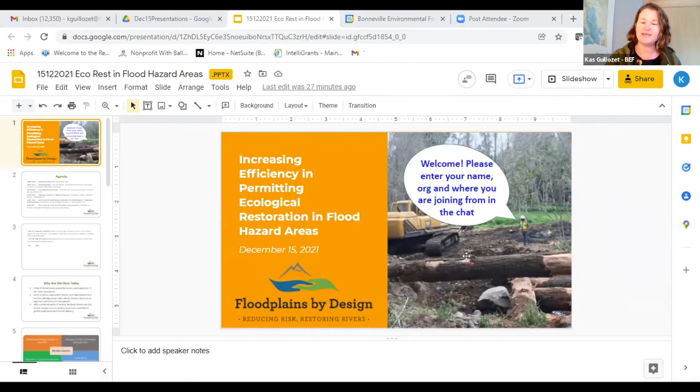I'm not going to completely repeat my spiel from last time, but I am going to orient you to the slides, give you a welcome, and make a couple highlights. My name is Kas Guillozet, I'm with Bonneville Environmental Foundation, and I have the honor of supporting the Floodplains by Design program. This is brought to you by Floodplains by Design in conjunction with many other partners. I want to give a shout out to my colleague Hannah, as well as Brandon Parsons, core members of our team, and Carol McElroy, a consultant who has been invaluable.

These slides are the same as last time, so if you were with us during webinar 1, the messaging remains the same. I did want to make a couple key highlights for you, however. First, the first webinar provided some perspectives from the field - why are we even gathering to talk about permitting, and what efficiencies might be possible in the realm of feasibility within legal requirements, balancing needs and interests.

The rescindment came up a few times and was explained a bit by different speakers, but there was one key piece informing a lot of what we're hoping to touch on today, and that relates to no rise requirements. Others might emphasize this as well.

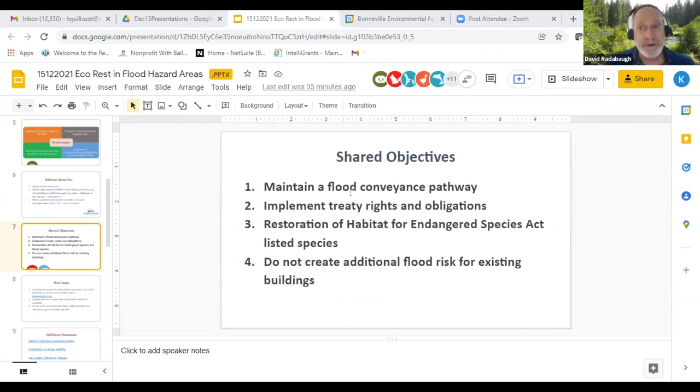In a sense, these webinars are an effort to have a discussion about how to bring these goals and objectives into alignment with each other and move forward simultaneously with them.

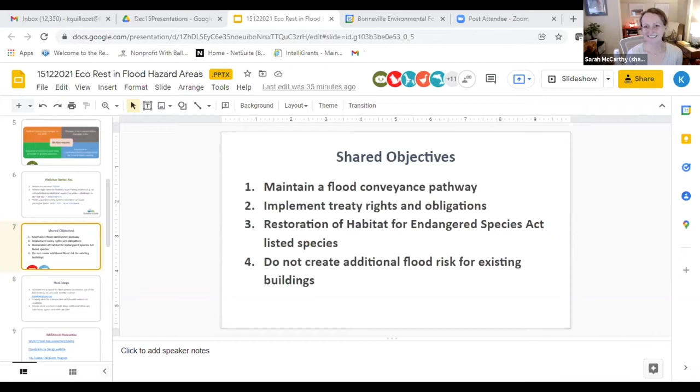Thank you. You said you have my slides up. I think I'm sharing my screen, right? Yes, can you see okay? Can folks see my slides? I'm seeing the shared objectives one, wrong one, sorry, but I'm happy to share from mine. Okay, if that works, I can bring it up. Apologies. Sorry about that. It's okay.

Okay, so thank you, Kas. My name is Sarah McCarthy. I'm a supervising ecologist and project manager for King County's Water and Land Resources Division, and my work is mostly as a project proponent, primarily in salmon habitat restoration projects. Next slide, please.

Like Kas said, I'm going to talk about conceptual project timelines and permitting considerations. As any project practitioner here knows, our projects can vary in complexity, from a small scale project working primarily outside the channel, maybe in a smaller stream without a federal nexus, to larger scale river projects where we're really trying to make big changes and reconnect the floodplain, with more impacts, federal nexus, etc. But no matter the scale or complexity, early assessment of our impacts is essential to effectively scheduling and budgeting our projects.

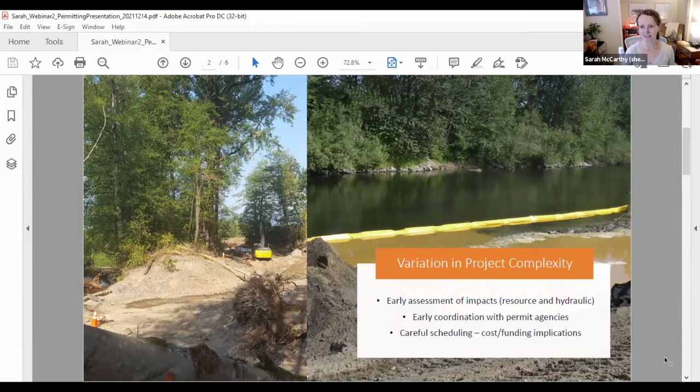With that early assessment of impacts comes a need for really early coordination with the permit agencies, both on the resource side and including the local floodplain administrator to understand what the requirements will be. Again, careful scheduling, understanding the timeline associated with those permits and with any hydraulic modeling needs and design loops, because all of that has cost and funding implications for our projects, which are working with limited funding and a critical timeline for salmon recovery.

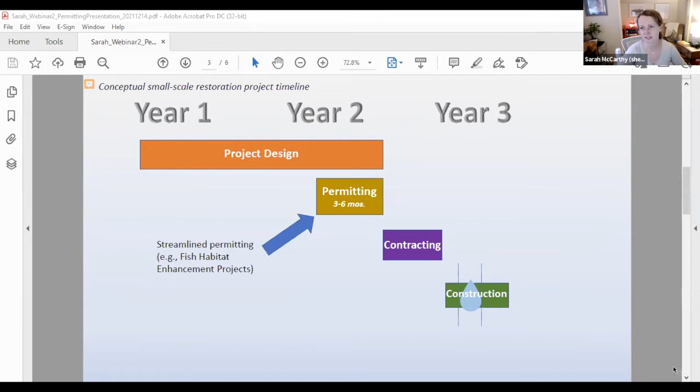So this is a conceptual timeline for a larger scale project. Again, these are largely made up, but in part based on experiences. Maybe this project takes a little longer to design, say 3 years. There's more analyses, more modeling required for the project, and say there's a federal nexus, so federal permits are required for the project.

Again, you're still striving for that in-water work window. You have a schedule that you know of, and you've made commitments to funding agencies. So again here, and this is where I think a lot of our worries and angst are coming from this year through these processes, is what should we be planning for? What does our timeline mean? And for projects that are already underway, what are the impacts going to be to our schedules?

So say with this project, it's going through the federal permitting process and modeling during that time, and determines that a CLOMR is going to be required. As far as our understanding, that starts once Endangered Species Act consultation is completed. If that extends the permitting timeframe, you're looking at risk to not hitting the in-water work window.

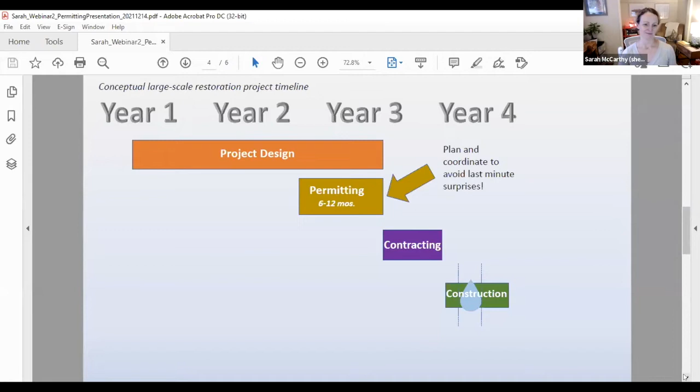So next slide, please. So even a small change in the project timeline can cause a project proponent to miss that in-water work window. Next slide, please.

And so, like I said, even small delays there can lead to bigger delays in construction timing. That has implications for grant funding for our projects. It has implications for cost associated with additional permit requirements that the project proponent maybe wasn't anticipating early on.

And so the bottom line here is that what we're trying to avoid is really putting our critical funding at risk, delaying the benefit for salmon that are depending on us to restore the habitat as quickly as possible.

And so I'm very excited to be part of this process, to look at opportunities to increase efficiencies, looking for flexibility where they might exist. My advice to project proponents is really to plan ahead, ask questions, and work with the permit agencies, including the local floodplain administrator, as partners to find the most expedient path forward.

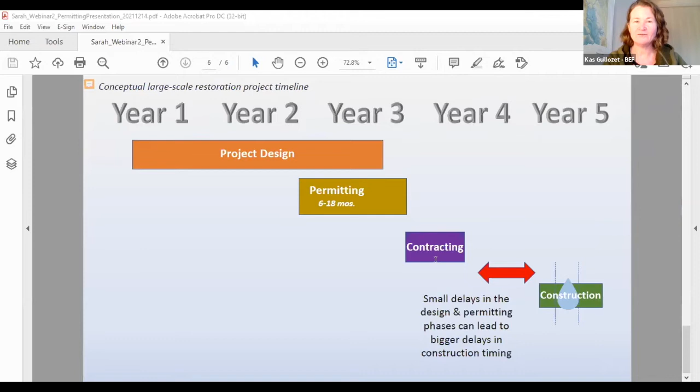Yeah, I'm glad to be here, and I'm hoping that you can hear me and that we can get slides set up. I'm going to try and cheat and have my version of my slides on my side so that I can see my notes. Let's see if I can make that happen. Okay, I think we got it there. So, you're showing the full version, so you're going to give away my poll question. No, I'll put it on present mode so people can't see. Yeah, go ahead and do that. I don't want people to get the... there we go. All right, thanks, folks.

Yeah, my name is Dale. I joined FEMA Region 10 in July as a civil engineer. I previously worked for a local community for the flood control zone district. Prior to that, I was a consulting engineer specializing in flood risk reduction and floodplain restoration projects. Just as a caveat, I'm the new kid on the block at FEMA. I've noticed already that Briar is a ninja in the chat answering questions, and I'm really glad to have a couple other FEMA folks here so that when we get into discussion, we can talk on some of the pieces that I'm less familiar with.

I'm not going to talk about the rescindment at all. What I want to talk about today is the 2D no-rise. So next slide, please.

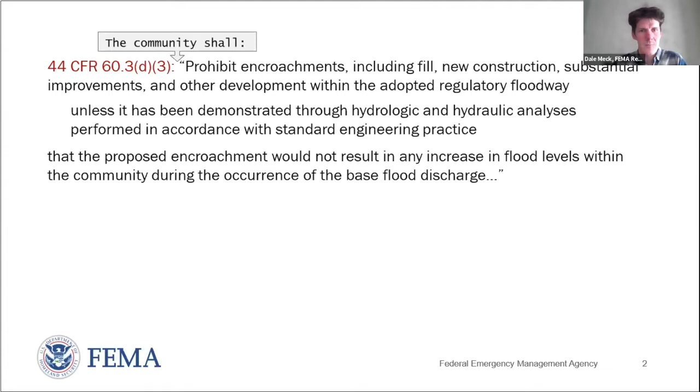Okay, so that regulation was written back when the NFIP was getting started. At that time, standard engineering practice was really limited to one-dimensional modeling. We didn't have many of the tools that we have today. And as a result, the regulations essentially have the simplifying hydraulic assumptions of 1D baked into them.

I won't get into the weeds here on modeling, but essentially for a 1D model, one-dimensional, you have to assume which way the water is going to go across the floodplain, and you have to assume which areas on the floodplain aren't effective—they don't move flow, they're just ponded areas. That all happens from somebody looking at a map and figuring it out, but you have to make that assumption outside of the model. A 1D model isn't aware of lateral variability in the floodplain—it's very straight line, one-dimensional. Those hydraulic assumptions are somewhat baked into the way that the regulations work.

And until recently, that was kind of baked into FEMA's implementation of those regulations—the guidance and the standards that we put out. So today, what I want to talk about is some updates to that guidance and standards as it pertains to the use of 2D models, specifically on the no-rise. The hope is that for some ecological restoration projects, this might be helpful for getting things done more efficiently. We'll talk more about that, but first I want to launch a poll question.

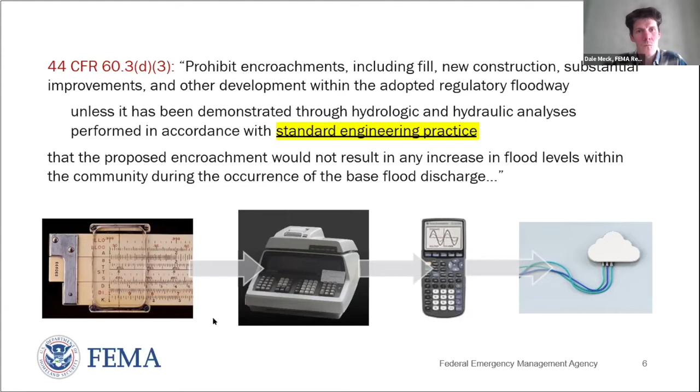guidance and standards documents to support the way that the program is implemented. This is essentially FEMA's interpretation and implementation of the National Flood Insurance Program and all the related CFRs. These policy documents are updated annually to reflect the way that we have new tools and new methods changing, so they've gone through a lot of changes.

GIS was a big one, the ability to do digital products was another one, 2D modeling is another one. The 2021 updates just came out actually. I put the link at the bottom, and I'll drop it into the chat a little later when I have a chance.

This is essentially the way that FEMA administers the National Flood Insurance Program, and it includes all sorts of rules on how to change the maps, what the maps need to have on them, how they need to be produced. But it also has guidance on the no-rise.

I'll note before we go on that this guidance and standards library, if you will, there's over 3,000 pages of document in that collectively. There's a lot of material, it's a complex program. They're all sorted into different categories. One of the things I'm hoping to do at the regional level is work to make certain parts of that more accessible, more available, in bite-sized pieces, and we'll touch on that a little bit more.

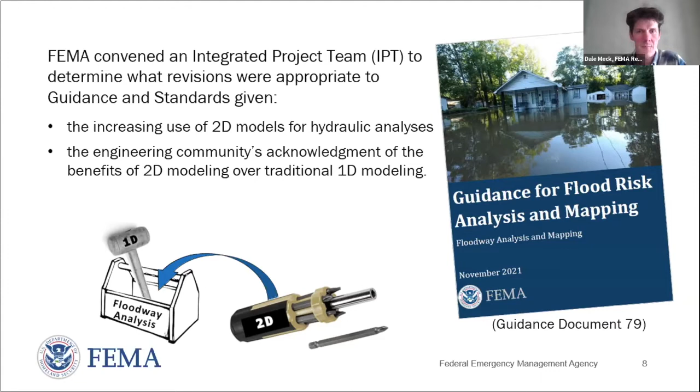What I want to do today is summarize some key points from it, recognizing that a couple of the other talks today are going to hit on field case studies that used a method along this line. There's a lot of text, so next slide.

In chapter 11 of guidance document 79, we lay out how you can do the no-rise analysis. This no-rise guidance is very similar to what you see in the regional document, the 2013 version, but it also has information on what to do for 2D models.

Essentially, the way it works is we let the model decide where the cross sections should be. We dump the water into the model and let it flow. Then instead of using an arbitrarily drawn cross section, we basically use what's called an evaluation line, which you could think of as a hydraulic cross section, to evaluate projects and whether they raise the base flood elevation.

A 1D model kind of averages all the way across the cross section, giving you one value for water surface elevation for the whole cross section. Whereas a 2D model gives you a water surface elevation at every cell across that evaluation line. So in order to do the same level of analysis as a 1D model does, which is what the CFR was built on, guidance document 79 says you can do that same analysis using a 2D model if you average the base flood elevation changes across that cross section.

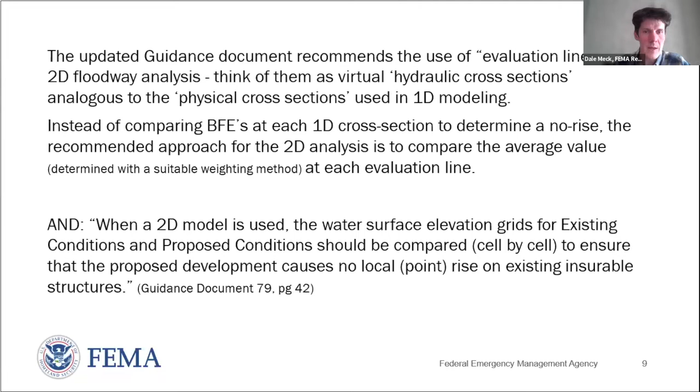If you can't meet that no-rise requirement, next slide, you still have to follow the CFR and the local ordinance. The CLOMR may be your best route. In a lot of situations, we tell people to just plan for it — if you can meet the no-rise, great, you save budget and time, and if not, you're ready to go.

We are working to update our regional no-rise guidance document to boil down chapter 11 of guidance document 79 to make it more accessible, both for project proponents, and we really want to stand by our local floodplain administrators so they know what to expect with a submittal and whether they can approve it or not.

I think that's it. I'll be around afterwards, and I'd love to talk more about this, but I want to respect the time here.

Hi everyone, thanks Kaz, and thanks everyone for putting on this great webinar. It's great to get all this input and continually try to improve the state of practice. This presentation will provide an overview of a case study that utilizes some methods proposed to FEMA for evaluating floodplains and floodways with 2D models a few years ago. This project was actually used to satisfy a no-rise for a project located in Yakima County.

Like Dale was saying, at the time this specific case study was developed, that 2021 FEMA document 79 that Dale mentioned was not yet available for public review, and at that time there really was no guidance for 2D modeling. In the last two years there have been some advances, but there's definitely a need to continue advancing that. Let's go ahead and advance to the next slide.

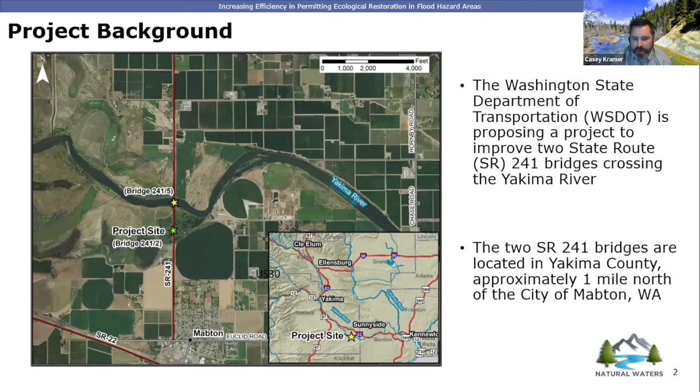This case study focuses on a bridge retrofit and a bridge replacement project on State Route 241. It crosses the Yakima River just north of the city of Mabton in Washington. In this photo, the flow is going from left to right. Go ahead and go to the next slide.

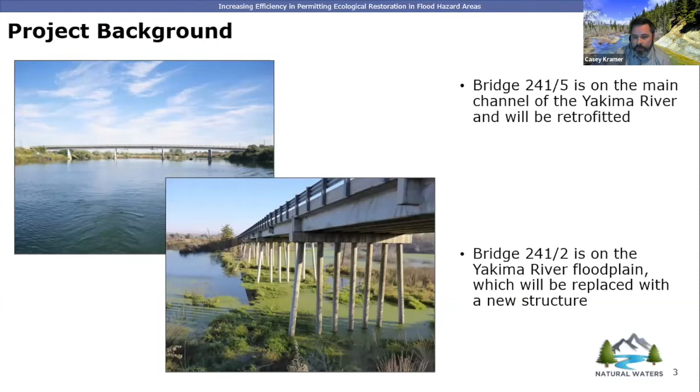There were two bridges. One was 241/5, over the main channel of the Yakima River - this one was only being retrofitted, so there was no in-water work. But the photo on the bottom, bridge 241/2, was located in the Yakima River floodplain. This is the one that was actually going to be replaced, providing an opportunity for more floodplain connectivity in the overall floodplain of the Yakima River. Go ahead and go to the next slide.

One key distinguishing criteria, as with any project, is really to go in and determine where your project resides within a special flood hazard area. This project site specifically was located in a FEMA regulated floodway. This graphic utilizes the FEMA National Flood Hazard Layer Viewer website, which, if it's available and updated for your project, can be a really handy tool for getting special flood hazard area information.

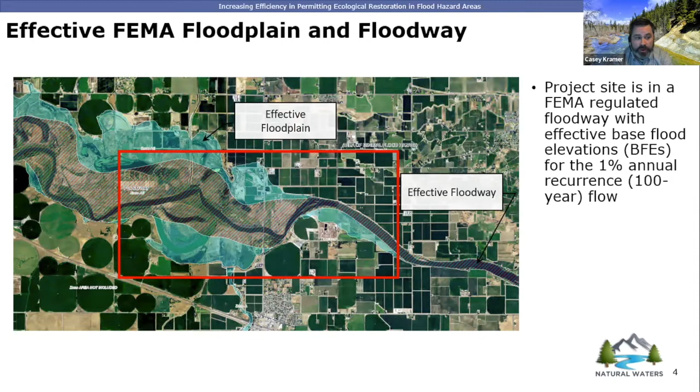For those that haven't looked at these before, the two distinguishing characteristics in this floodplain are the effective floodway, shown with those red hash diagonal marks in the main core of the flow, and the blue shaded area, which is the 1% annual recurrence, or the 100-year flow inundation limits. Let's go to the next slide.

That red box in the previous slide - this slide is a zoomed in version of it, depicting the FEMA base flood elevations, or BFEs, shown as the little wiggly lines with an elevation associated with them. Also shown here are FEMA cross sections, depicted by the black lines with letters next to them, and State Route 241, shown here with the red line. Flow is going from left to right again. As we'll discuss further regarding how a no-rise was completed for this, the base flood elevation on the furthest downstream extent, the far right squiggly line, was utilized as the boundary condition for this no-rise assessment. Let's go to the next slide.

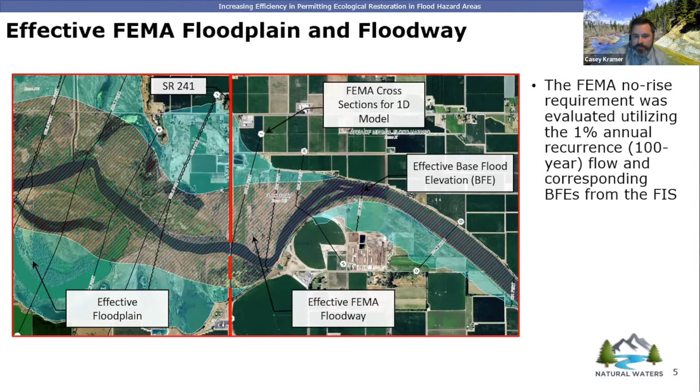For those that joined us for the first webinar, Ted went over a general no-rise process that would be utilized. But for folks that weren't able to attend, or are new to a no-rise, this lays out the general process a licensed engineer would have to go through in completing a no-rise process. We'll be walking through these steps as we go through the presentation, but the first step is obtaining a copy of the effective model used to develop the effective flood insurance study.

These models can be made available from FEMA, and sometimes local jurisdictions will also have copies. In this specific case, no model was available, and we'll talk about that as we go through here.

The next step is you would duplicate the results of the effective model, if available, to create what they term a duplicative effective model. After that, you would make corrections to that effective model to create a corrected effective model. Corrections may include improvements such as technical errors in the effective modeling or the inclusion of any floodplain changes that occurred prior to the date of the effective model.

Next would be to develop a model for existing conditions, reflecting any modifications that have occurred within the floodplain since the date of the effective model, but prior to the proposed development—prior to your project. This creates the existing conditions model. Again, in this case specifically, no effective model was available, so if that was the case for your project too, the corrected effective model is more or less the same thing as the existing conditions model.

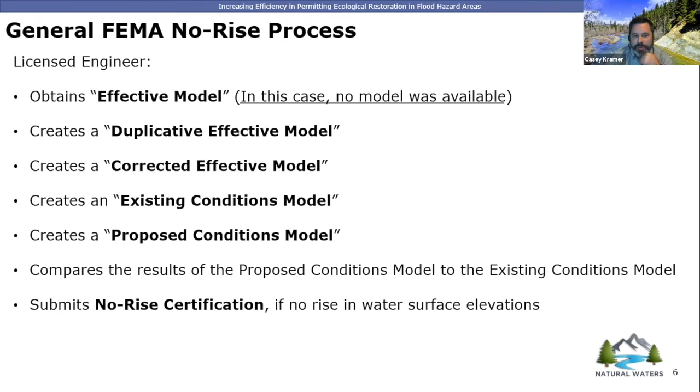This is depicting the domain of the model that was utilized for this analysis. This consisted of a 4-mile reach with a floodplain that greatly varied—about 1,000 feet in width downstream, where the river gets confined within a canyon, and that varied upstream to over 10,000 feet, so over a 2-mile wide floodplain on the upstream end. As is important with any kind of modeling, the domain was selected such that the boundary conditions didn't affect the model results at the project site, which was verified through a sensitivity analysis that we performed.

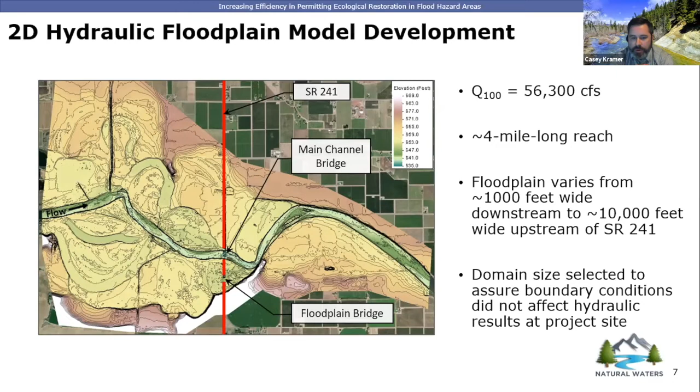So let's go to the next slide. This depicts the existing bridge and the proposed bridge and the corresponding meshes in the 2D hydraulic model. This is showing software SMS and SRH2D, promoted by the Federal Highway Administration, which is utilized for conducting the 2D analysis. The graphic on the left is the existing bridge versus the graphic on the right, the proposed bridge. What you can probably see is that the proposed bridge provides more hydraulic conveyance, which also encourages more floodplain connectivity in this relief bridge on the Yakima River. It also provides more free transport of any woody material that may have gotten hung up on the previous bridge.

One other thing Dale mentioned that's really important here is a key distinction between a 1D and a 2D model. If you look closely in these graphics, you can see all these little cells or elements—some triangular shaped, some square shaped. What's important is that for every single one of those elements, you actually are getting a water surface elevation and a velocity and other hydraulic characteristics. Whereas in a one-dimensional model, if you had one cross section drawn across this, you would only have one water surface elevation and one velocity. In this model, along that same cross section where you'd see only one result in a 1D model, in this case you'd be getting several hundred results.

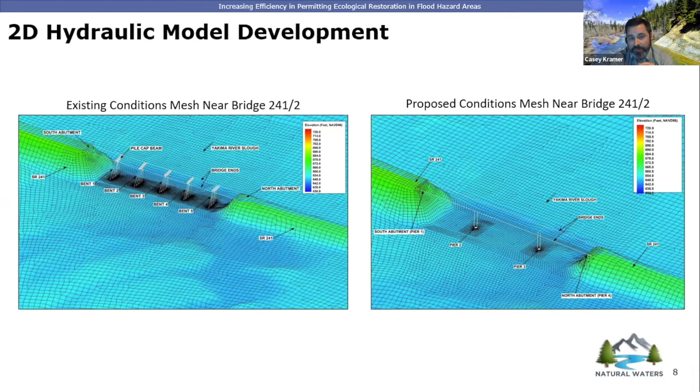So the takeaway there is that two-dimensional models can provide a much better understanding of hydraulics and flood risk. Go ahead and next slide.

So this graphic here is a depiction of the corrected effective model, which in this case is the same as the existing conditions model. As previously noted, the FEMA flood insurance study flow and the base flood elevation were used for the upstream and downstream boundary conditions respectively. The 661-foot contour on the right aligned with the FEMA BFE from the effective study, so that was the downstream model boundary condition, and the FEMA flow was utilized for the upstream boundary condition.

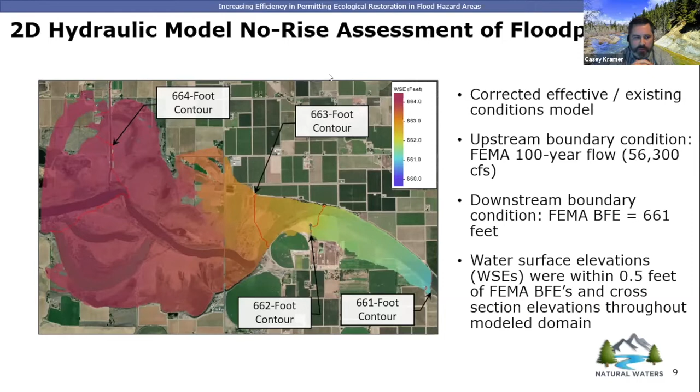The color contours here show the variations in water surface elevation that you're able to get out of the two-dimensional model. Also shown here are those red lines, which depict 1 foot whole water surface elevation contours across the channel.

So in straight narrow reaches, like the one downstream, where you may have a project in a very confined canyon, that's a location where you may see pretty good agreement between a 2D model and a 1D model.

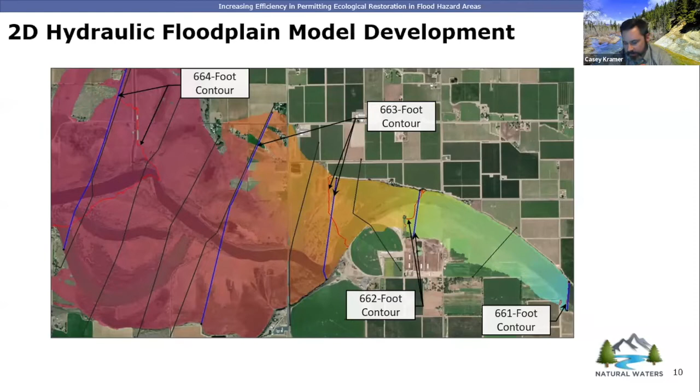Go ahead and go to the next slide. Once that corrected effective existing conditions model was completed, contours at a specified interval -- in this case I just used 1 foot as an easy example -- were used, as Dale suggested, to create these evaluation lines. These evaluation lines are really important because they are the location at which you compare your water surface elevations to demonstrate no rise. These are also the locations at which that discharge weighted water surface elevation is computed.

This is important because in the case of a 1D model, the location of where evaluation takes place is really subjective to the modeler. Whereas in this two-dimensional model and procedure we're outlining here, it is not subjective -- it's actually based on the hydraulic model results.

Next slide, please. So using that corrected effective existing conditions model as a baseline, the proposed bridge was added. Those same evaluation lines from the existing conditions model were utilized to assess discharge weighted water surface elevations for the proposed conditions. Like Dale mentioned, one of the criteria that is a little more stringent, but great for evaluating flood risk, is that there was also a difference plot of the 2D model results to look at local rises.

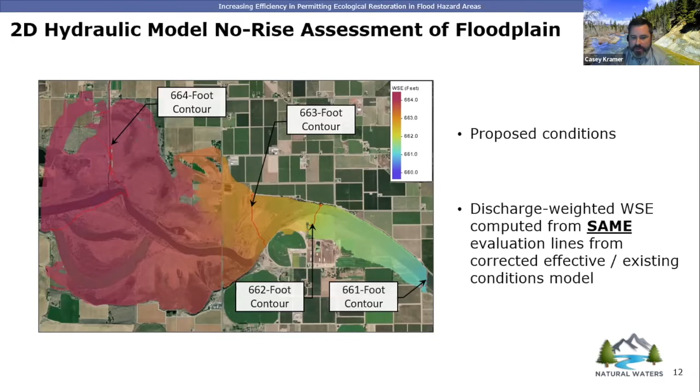So once you have the existing conditions evaluation lines, those contours, as you can see, are those even 1-foot contours, but those could be specified to any contour interval the modeler would like. There's some guidance in Document 79 alluding to the spacing and frequency of those lines. The proposed conditions in this case utilize those same evaluation lines and then obtain the discharge-weighted water surface elevation. It's a simple subtraction of proposed minus existing. If your difference is less than 0.005, you'd be deemed to meet a no-rise, and that's what would be submitted to the local community.

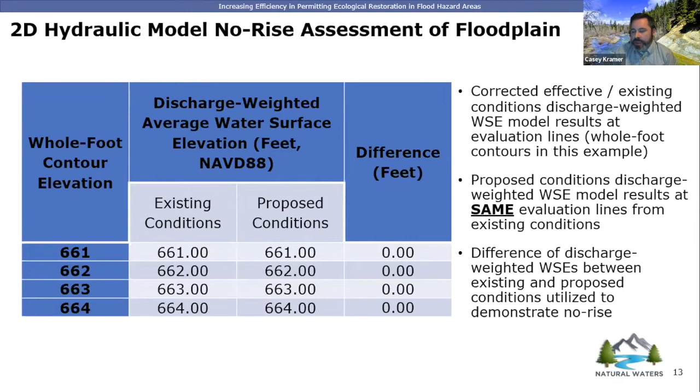Calibration probably should be accounted for, because it's not uncommon for FEMA mapping to not be based on true flood risk in some cases. So I definitely wouldn't blindly calibrate to an effective model. You go through and do your best developing your model based on conditions. In this case, because of the geometry and hydraulics through the project site, we were able to meet the criterion where if you're within half a foot of the water surface elevation at the upstream transition, that was the requirement. So in summary, half a foot of that discharge-weighted water surface elevation to be within the water surface elevation reported at the FEMA cross section.

There are a lot of focused questions that feel really important, and we're also a little limited on time. I want to call out this one from Sean Welch, asking what about 2D encroachments to determine the floodway, and how did mapping change? If you have a couple more, we'd prioritize wrapping up, but thank you, Casey, this is great. Yeah, there's a lot to cram in here. These are good questions, I actually had to take a lot of information out.

So the floodway, we did a floodway encroachment analysis on this as well, but I had to remove that due to time. Maybe this is sparking some additional thoughts, and we could have a follow-up afterward, or maybe it's another webinar topic at another time. Yeah, so just to close out here.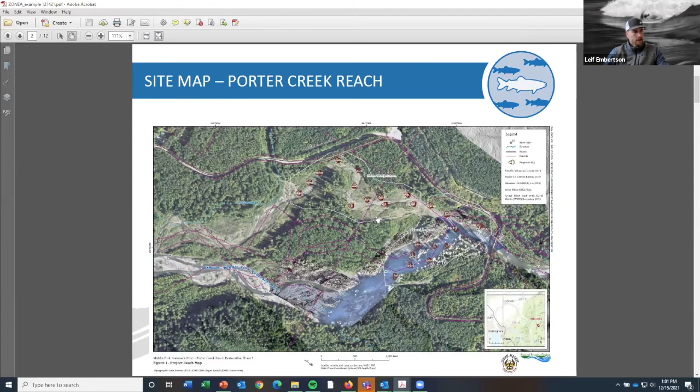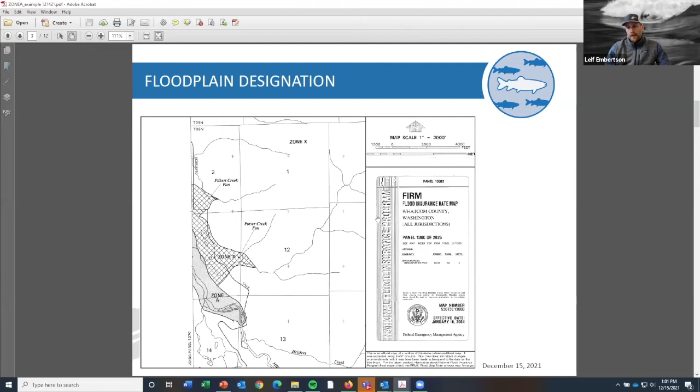Here's the FEMA effective map for that area. In an approximate zone A floodplain, essentially no detailed study has been done. There's a wide variety of methods used to delineate zone A floodplains, but essentially a modeling effort similar to a floodway or zone AE floodplain did not occur, so the methods used through that process are variable.

I thought I'd start with some best practices I've learned over the years doing floodplain analyses and no-rise calculations. One, like Dale mentioned, whenever you start a project, check your local community code. Every community has their code in different locations—for a county it might be the county code, it might be in shorelines. It varies depending on the community, but every community has their own code.

Communities have to adhere to the minimum NFIP requirements, but can also have more restrictive requirements. Common examples in Washington State are King County and Pierce County, which have much more restrictive floodplain regulations than the minimum NFIP requirements. So you want to understand what community you're working with. For the minimum requirements in the zone A floodplain, you're allowed up to a 1 foot rise in the existing condition flood elevation—you don't technically have to meet a no-rise. What I like to call this is more of a floodplain impacts analysis, to understand the impacts of your project and whether they're below that 1 foot threshold.

Another really helpful tip: I like to start all my efforts with a pre-application meeting with your local floodplain administrator. That's pretty common in the permitting world for ESA listed permits and other areas. The same goes for floodplain permits and regulations here. There's a lot of nuance and technical things you want to work through.

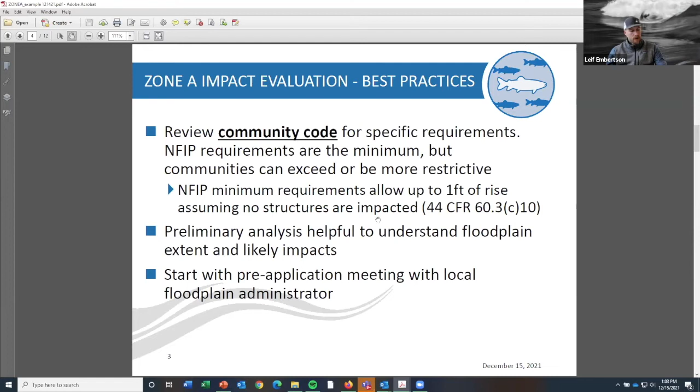In that pre-application meeting, I walk through the technical approach that's going to be used for the project. What's the available information? Have you done a FEMA data archive request? Does the county have information, or have other studies been done in that area you can make use of? Are there any structures in the floodplain? What topographic data are you going to use? What's your hydrologic analysis for the project, and your hydraulic modeling? Walk through all the steps of that technical analysis.

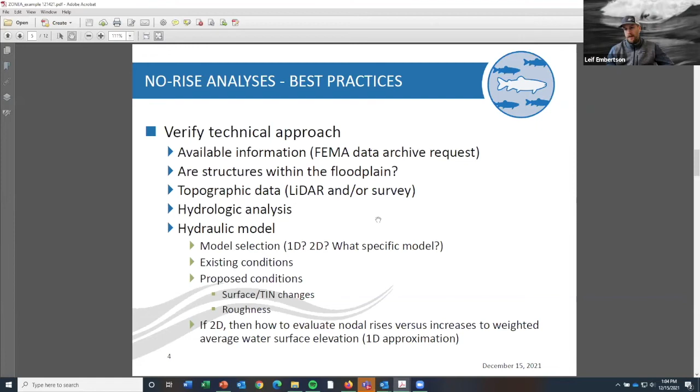These calls are really with your local floodplain administrator, not with FEMA. Oftentimes FEMA gets called into these discussions, but these are approaches that your technical professionals helping advance your project should provide insight and recommendations on back to your local floodplain administrator. You want to work this out before you get the process underway, so you don't go down a pathway that doesn't get you your permit at the end.

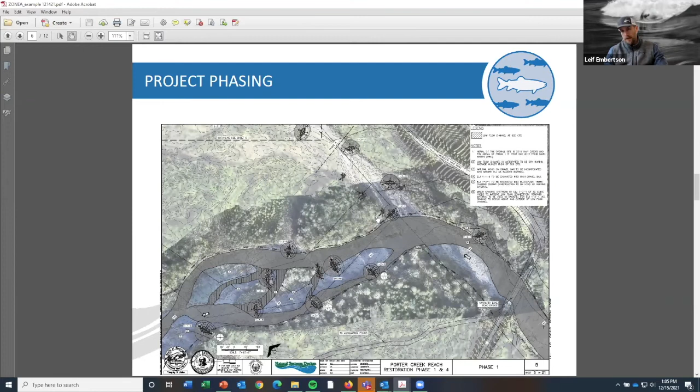Quick note on phasing. As I mentioned at the start, this project, the analysis I'm presenting here, was for two phases of this project, which will probably encompass four or five total phases. As every phase was permitted, the project was required to look at the cumulative impact of each of the phases. Since it really was one project being built over multiple years, the local floodplain administrator here, and I believe it's even FEMA policy, requires you to look at the cumulative guidance for all the phases, not an individual phase.

Now, when we took that rise and used a similar approach that Casey was describing in terms of a cross-sectional analysis, the results showed we did not exceed that 1-foot threshold for allowable rises in the Zone A floodplain. This work was done in 2015 or 2016, so we used more of a cross-section analysis, not exactly what Casey and Dale talked about in terms of a contour analysis across the cross-section, but a similar process of creating an average water surface elevation using the 2D model mesh to determine our average rise or impact across that cross-section.

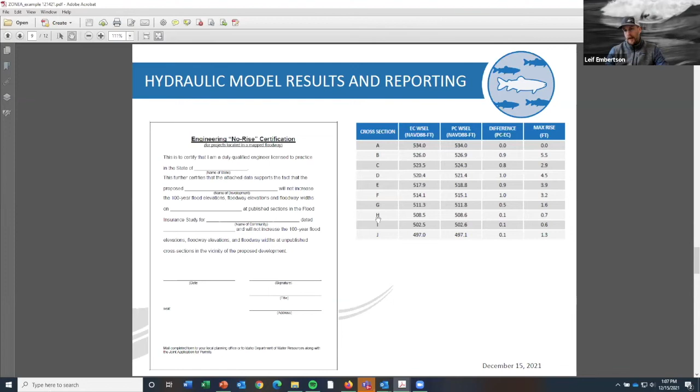From there you can see the table. This project kind of pushed the boundaries of what's allowable in the Zone A floodplain, because in a couple areas it reached up to 1 foot of rise. Then, through the floodplain development permit process in Whatcom County, we submitted a technical report detailing the analysis and approach used, and included an engineering impacts certification stating that this doesn't cause more than 1 foot of rise in this area. We submitted it to the county for their review and approval.

I thought I'd end with some common questions I've encountered during this process as a practitioner. My intent here isn't necessarily to go through the answers, but just to prompt people to think about how we want to represent restoration projects in hydraulic models, as there's a lot of variability in how we represent restoration projects in hydraulic models. A lot of that comes down to professional judgment.

A common question that comes up in projects I'm involved with is how to handle porosity in different log jams. Some log jams are more like blocked obstructions that really do not have any inner flow through them, but other log jams have a lot of inner flow and some amount of conveyance that simply blocking that area in your model doesn't appropriately reflect.

How do we want to handle scour? We know if a log jam is designed to be stable, it's going to create a scour hole, and that's going to increase capacity. That may or may not be something built as part of the project, but might be something to consider in your evaluation.

Another big one is that a lot of these projects are built to restart geomorphic processes that are absent in many of our river systems but were here historically. So how do we handle the expected geomorphic change from these projects? That's a big one to think around. Technically, as I understand FEMA regulations and floodplain code, we're really evaluating the as-built condition, and this future geomorphic response is something to think about, but isn't really incorporated into the process right now.

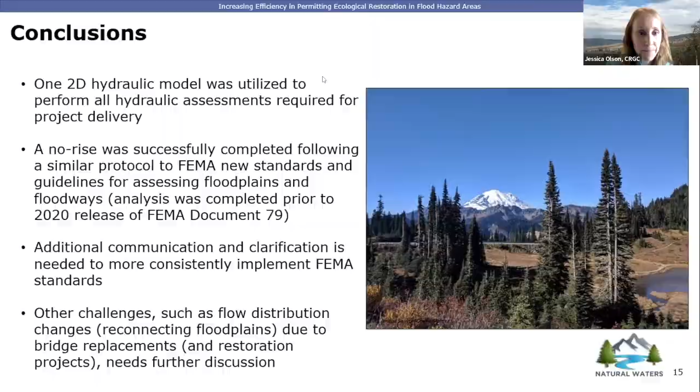Thank you, Kas, and I appreciate that. We are shifting gears a little bit, and I'm really thankful to be here learning from all of you today. When I talked to Kas about this, I was so excited because we at the Columbia River Gorge Commission have been talking about these same types of issues. So I'll share our perspective on permitting, streamlining, or however you want to characterize it. My name is Jessica Olson, I'm a senior planner with the Columbia River Gorge Commission. When we get into the slides, I'll share a little about how we work and the regulatory framework in the gorge for those who may not be familiar.